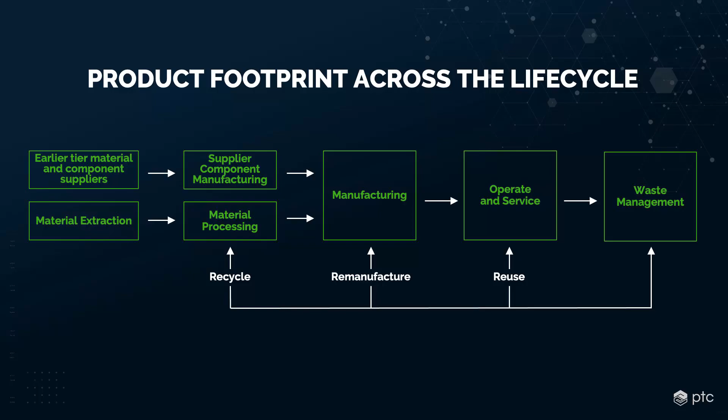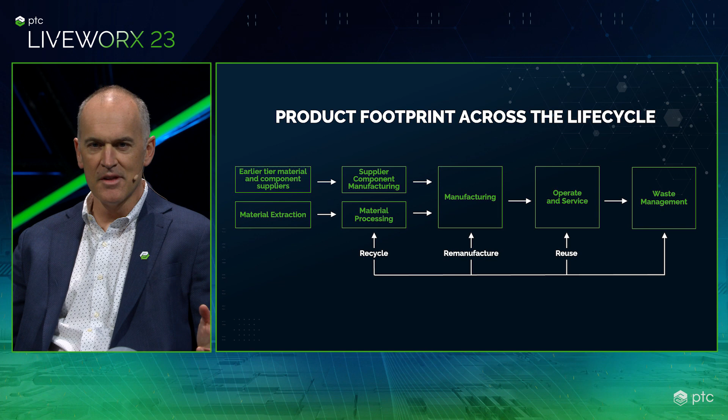One point there is that in the factory, you may think that's where all my emissions are as a manufacturer, but in reality, for most of our manufacturers, it's on the sides, the upstream and the downstream, where 90% to 99% of the total emissions exist. Yeah, it's the place where people see all the energy being used, but it's not actually where the true driver is.

So with that framing in mind, I think it would be really helpful to walk through the product life cycle, really from design all the way through to end of life. And we'll share some examples with you all of what's already been done, and maybe some promising areas for further focus as well.

And I think any of you that were at the keynote yesterday, Jim mentioned that 80% of a product's footprint is determined by decisions made back up in the design phase. So maybe explain that 80%, Dave, where does that come from between upstream and downstream? We hear about 65% to 85% are with design decisions, but overall it's pretty high.

Because products are made out of materials, and embodied carbon is such a big piece of that, and for some energy intensive products, you have to make design decisions around how they use fuel or energy downstream as well. Yeah, so it sounds like sustainability is going to make the life of a design engineer a lot more challenging.

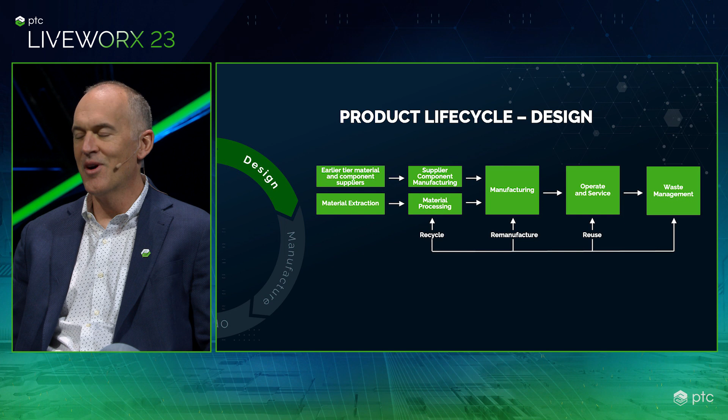You used to try to balance performance, cost, and maybe time to market, but now you're adding footprint to the equation. So it rapidly becomes a plate of marbles that you're looking to balance in a multi-criteria way. But the good news is, one, there's technology that can help, and secondly, it's motivating for engineers to do this. They all want to reduce footprint and cost in measurable ways in their jobs.

So definitely a challenge. Given the importance and impact of choosing material supplier, yesterday we announced that we were expanding our partnership with ANSYS.

Let's give folks a little more detail on what that integration looks like and why we're doing that. Materials have been front and center in design decisions for a while for performance, cost, and appearance, but what's really pushed it to the forefront, where designers need to get involved earlier in the design process, is embodied carbon and hazardous material regulations, and recycling possibilities, particularly as companies are making those commitments.

So Granta offers a curated material database that comes with thousands of reference materials. Customers can add their own supplier-specific material variants, as well as their custom materials. This helps engineers find better materials, and then ultimately better suppliers of that material, because suppliers also innovate in different ways to take footprint out of product.

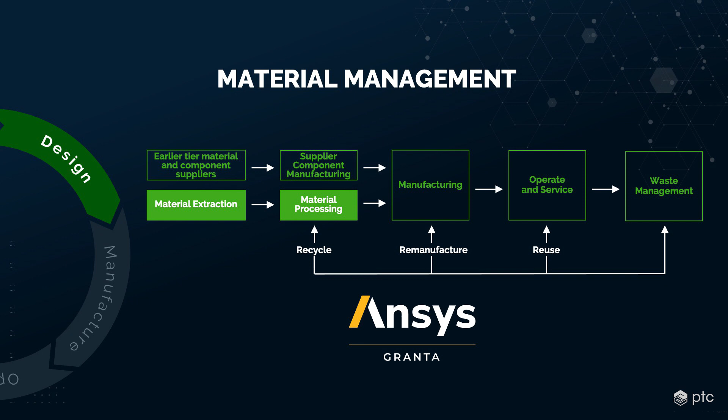So let's take a quick look at this video. As you see here, there's a user that starts in Creo, and then punches out to the ANSYS Material Gateway database, which is purpose-built for a design engineer to use. They select parts that the material engineers allow them to see based upon whatever criteria they want, like density or footprint, and you see here a list of candidate materials returned.

And they take a closer look at titanium, where they can see attributes across appearance, performance, footprint, and other things. They say, okay, great, that titanium is something I want to use in this turbine part. So they select it to go in their project, and then add that to the specific parts they want to include it in, including this turbine.

So next, they go back out to Creo. And within Creo, you can see that the Granta material ID is properly linked and part of the digital thread as a high quality reference on that Creo design. And this integration works similarly from Windchill as well.

So Granta definitely helps with sustainability for these, I'll say, make parts. But what about pre-built components or buy parts? Right, so there's been a strong market of supplier component databases for a while that both Arena and Windchill have integrated with. Some of these include Assent, Compliance Maps, Silicon Expert, Octopart, which is now part of Altium, and IHS Markit.

And the trigger for design engineers to get involved with this earlier were hazardous materials like REACH and RoHS compliance. But more and more, these electronic suppliers are including embodied carbon in their data as well, which helps with the footprint roll-ups and decisions designers can make. It's mostly electronics focused now with these catalogs, but now that embodied carbon is such a big deal, we expect this market to expand into other areas, and we'd be able to integrate in similar ways.

With environmental impacts of mining and material processing, it's great to see that this is now an integral part of the digital thread and digital transformation decisions. But it'll also drive other values like performance simulation and manufacturability planning.

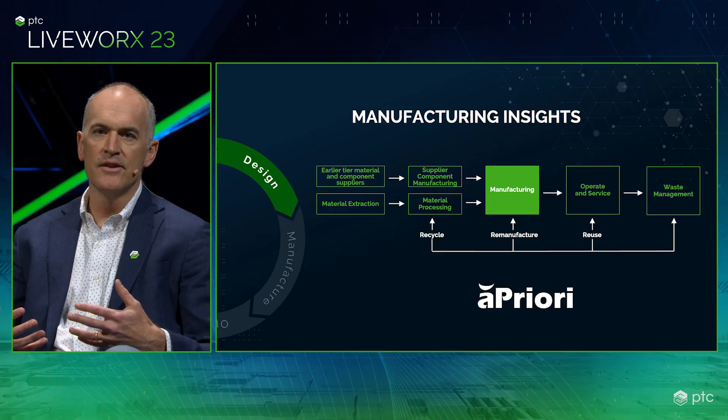And the way it does that is it takes material definitions and geometry from CAD and PLM, and runs a simulation with their digital factories, returning a scorecard that tells you how well you're doing, but more importantly, it prescribes ways to improve.

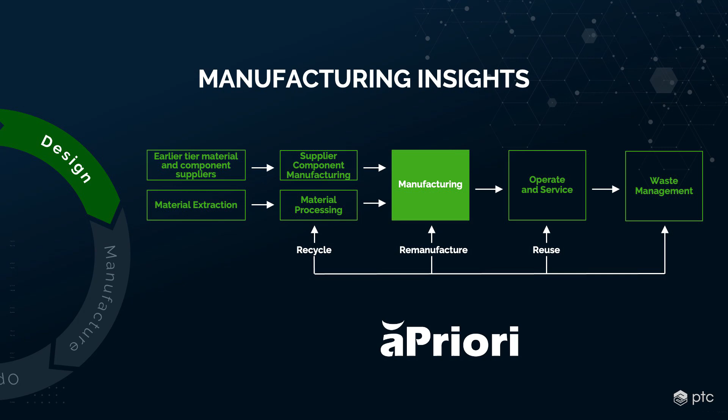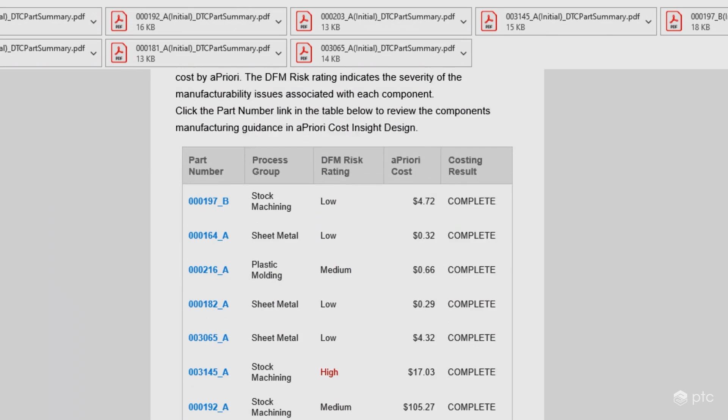So let's show you an example here. In this scenario, aPriori can run a batch job. It could be daily, it could be more frequent, based upon checked-in or state-changed parts within Windchill.

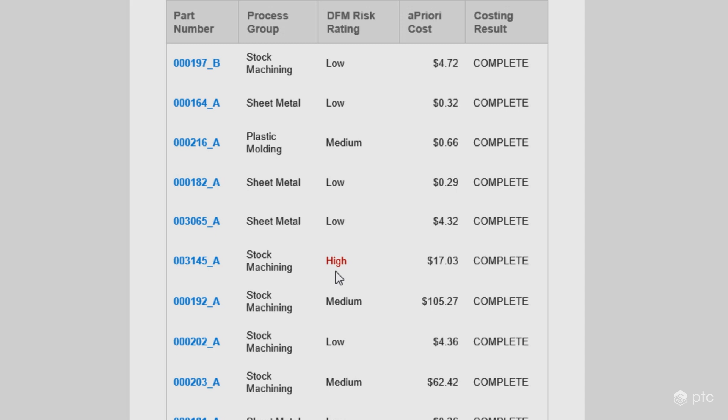And here you can see most of the parts come back okay, but there's one that has high risk. So here, the part owner in Windchill can look at this report and click on a hyperlink that takes them into the aPriori aP Design product, which is also purpose-built for a design engineer, and figure out why the score is high on this.

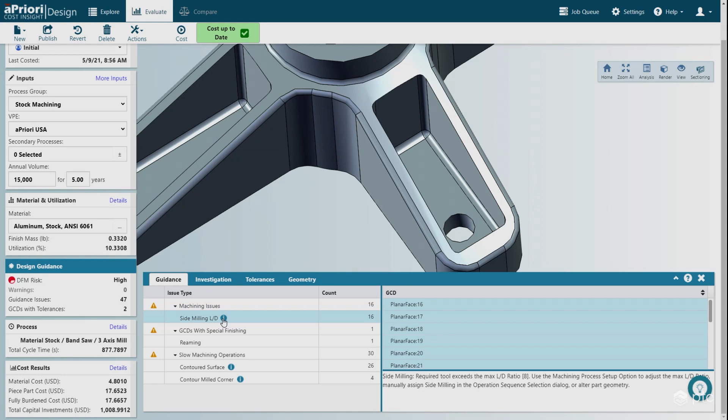It's because the inside diameter is too tight for quality milling, which can result in unwanted scrap rates. So it recommends that a rounder corner diameter be made. They go back into Creo, and reasonably quickly they can make a better inside angle that's a little more gradual.

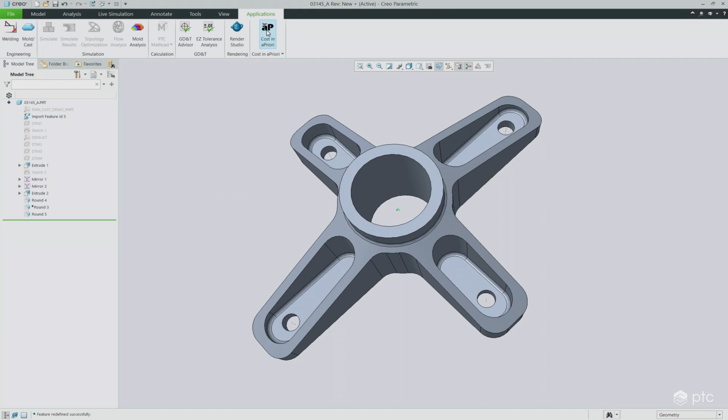On the inside there, so that their scrap rates will go down. And interactively, they can punch right back into AP design and rerun it, asking: okay, you asked me to fix this, I fixed it, how's it look? Great, the red's gone. So they fixed that problem.

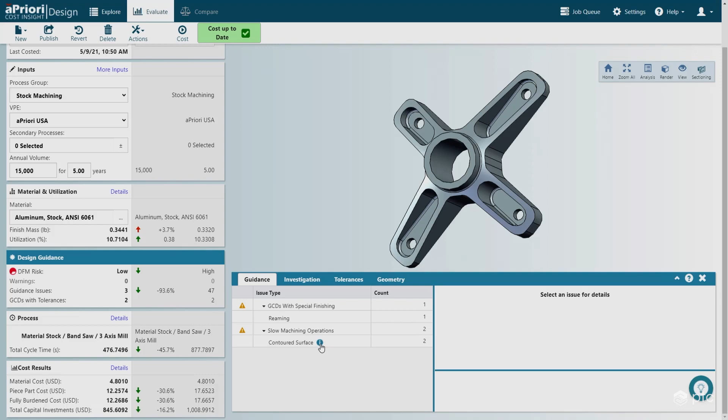And subsequently, they can look at all the other data they get back from that simulation to see if there's any other tweaks they want to make. They can look at manufacturability, cost, footprint, and here they find a less severe, but a tweak that might be worthwhile, potentially removing some material to get a smaller angle on the part, which makes it easier to manufacture and dematerializes it a little bit. So there's a lot of value here for running this subroutine. Definitely worth investing in.

All right, so Granta, or ANSYS Granta, and aPriori both help with material selection, but reducing the amount of material is also another significant driver of sustainability. Yeah, it sure is. Let's show an example.

Here's a 44-pound motor mount of a Volvo truck. It supports an 11-liter engine that weighs about 2,000 pounds. It's made out of iron. It functions really well, but I can barely lift this thing. It's a beast. I don't actually know what's wrong with you, Dave, because I can lift with one hand, no problem, the exact same part that takes even more peak stress than that old-fashioned mount that you have.

It uses the same material, same casting process, and it's using our generative design technology. Want to explain a little more, other than the fact that you need to go to the gym? Yeah, I could probably skip the gym and just hit that generate button a little bit more, because here, what you did removed between 50 and 60% of the embodied carbon of that part. But more importantly, you took 26 pounds out of the truck. Okay, that's going to drive down the road hundreds of thousands of miles, so that's going to reduce either fuel needs if it's diesel, or electric needs, or hydrogen needs if it's an alternative powertrain.

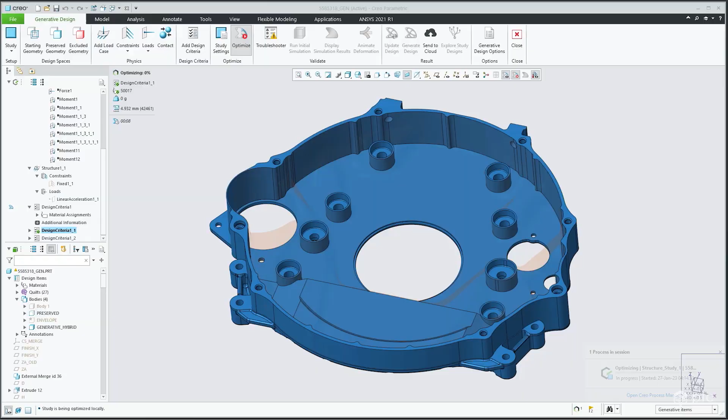Designing for sustainability has many flavors to it. The place where I'm placing a lot of my emphasis is to make sure that when we design a product, we don't design it with any more material than is required to attain its strength or stiffness goals. So it's really looking at the full life cycle of the product and making sure you're not using any more material from cradle to grave.

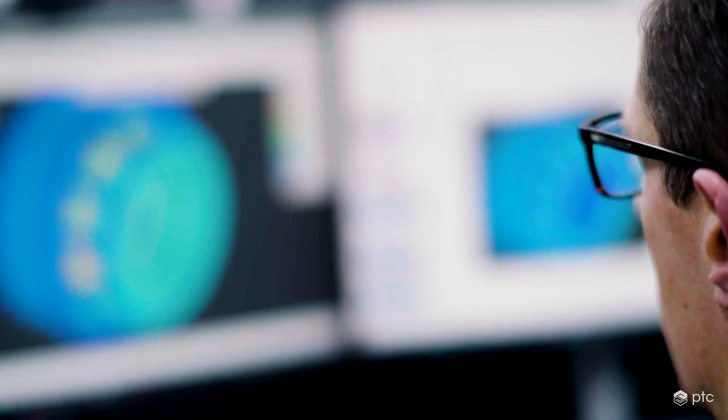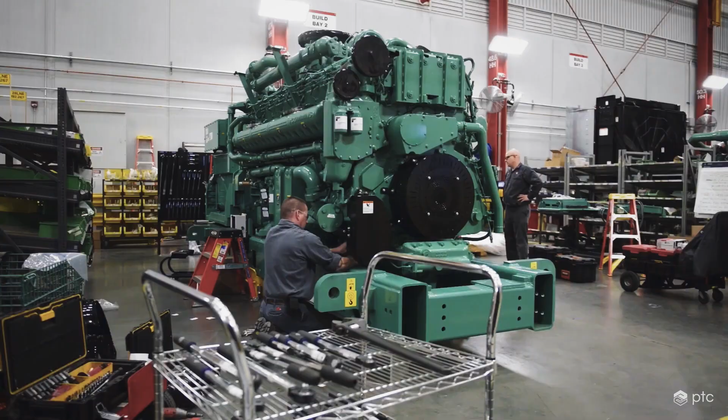And to do that, you need special tools like Creo Generative, or tools that help you understand where you are potentially putting wasteful material into the product. Some of the analysis tools within Creo enable us to do the iterative work up front within design, where it's the most efficient place to do that type of work.

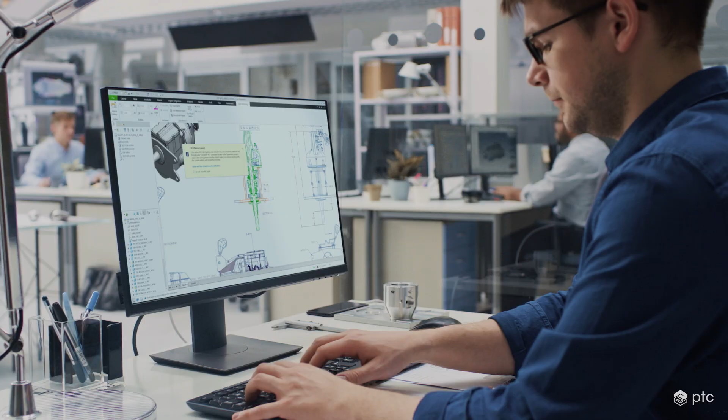Design engineering really does have a very important role to play when we're trying to meet our sustainability goals. We now know that when you apply these techniques, you can expect to save between 10 and 15% material use, and you can pretty easily calculate what those benefits will be from a total CO2 perspective. But one thing nobody knew until we did that work is how much that would translate to in terms of overall cost savings over the course of the year.

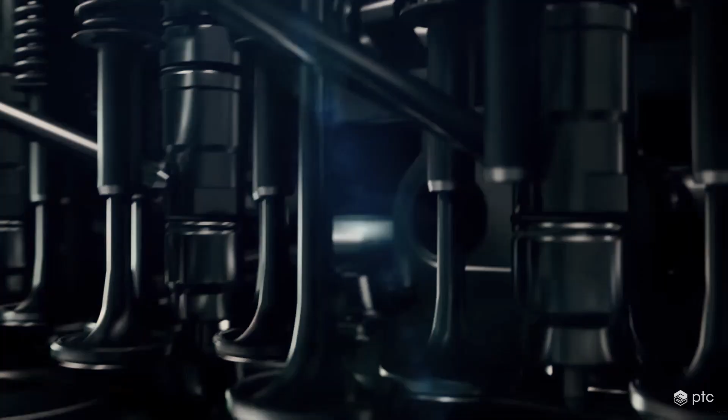There was not only a big impact on the environment when you take that 10 to 15% savings and multiply that by the number of components you make annually, but there's also a cost savings that comes with that, and a weight savings. The weight savings has compounding effects when that engine goes to work in a truck. The less an engine weighs, the better fuel economy it gets. It really has a compounding effect.

From a design engineering perspective, it really allowed our designers to go home at the end of the day saying, I saved $500,000 today, or I saved $200,000 today. It really provided some value to their role that they had difficulty making tangible before we started this work.

Fantastic, that's a superb story. Not only is Cummins achieving their sustainability goals, they're also driving costs down and actually energizing and motivating engineers in the process. So a triple win.

Let's move on to the manufacturing side. We discussed several ways that engineers can set up the factory for success through materials and material supplier selection, lightweighting, and manufacturing simulation, but there's a lot more that can be done.

One of the areas that there's a lot of folks out here talking about is energy management or energy efficiency. Talk about some of the products that we're seeing and the partners that we're working with.

Energy management—we mentioned earlier that the factory is the minority of emissions for manufacturers, but it's your scope 1 and scope 2. It's the direct energy that you can affect. So the Science Based Targets initiative and others prioritize bringing that down. This is absolutely a priority for companies to do, and they're doing it.

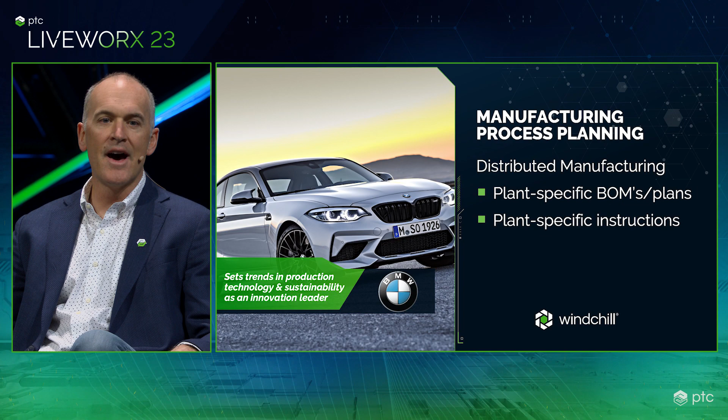Maybe we should move on to the next phase of the product life cycle, the operate and service phase. During this phase, there are two big footprint items. The first is shipping or sending service workers or technicians to a location to service the product, or shipping the product back to a central location. The second large footprint activity is all the embodied carbon tied up in spare parts networks for just-in-case stocking. Here we have lots of examples of companies using our service products and solutions to both get great business results and do good for the environment. Maybe we should talk about a couple.

Metso is a mining equipment provider. Before you all say something about a mining equipment provider at a sustainability talk, the truth is there's going to be a spike in mining for renewable energy infrastructure over the next decade. Working with our Servigistics team, Metso has been able to permanently drive out over 40 million dollars of spare parts, so a lot of embodied carbon completely eliminated. Business-wise, they've been able to improve their fill rates by over 3%.

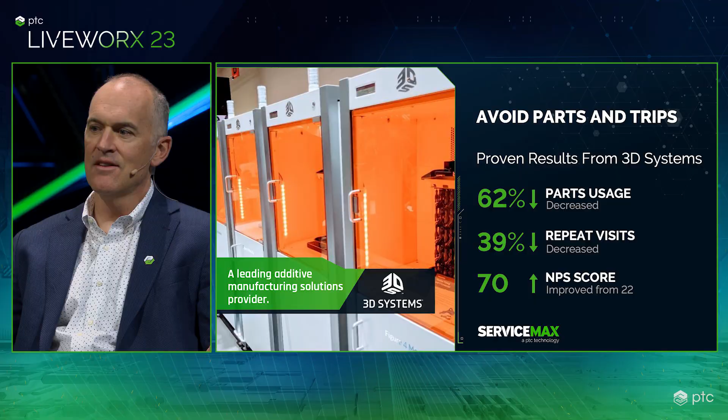Similarly, 3D Systems from a field service perspective has great results as well. Like our other customers helping with the transition, 3D Systems is a leading additive manufacturing solutions provider. They help move the needle in a couple ways. One is 3D printers by nature dematerialize, because you don't have the same subtractive manufacturing constraints you would otherwise have. Secondly, which many people don't know, is they also deploy 3D printers to remote sites, like a mining pad in a remote area or a large ship out at sea, so they can print critical parts on the spot rather than have that asset down for a long time and spend all the fuel to helicopter parts in as an emergency.

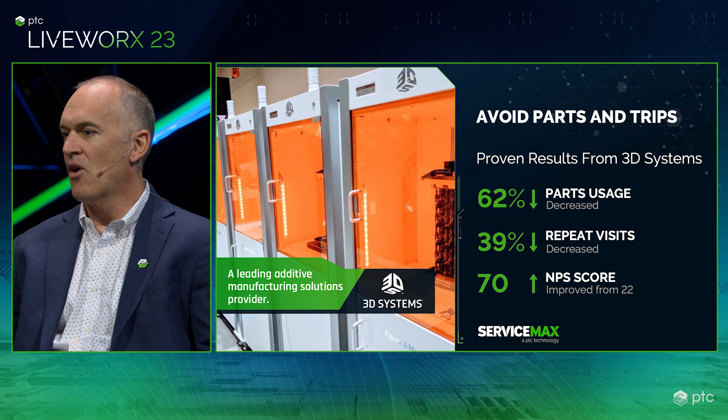But 3D Systems has deployed through ServiceMax an asset-centric field service. If you think of field service classically, it was more appointment-based. Like cleaning services or your cable company, it's a foregone conclusion that you're going to roll a truck to the equipment or customer site, and it was more a problem of how do you efficiently move people. But with asset-centric field service, kind of like with Servigistics, you order or manufacture a new part as a last resort, and you send a dispatch as a last resort. There's so much you can do remotely to resolve issues, either through software updates or helping the customer out remotely. And if you do have to roll a truck, you can prepare much better remotely, so you fix it on the first trip.

So what 3D Systems has been able to do, and the results they've seen, have been astounding. 62% fewer parts used because they have precision diagnostics, and when their tech shows up, there's a 39% lower chance that they'll have to come back because they couldn't fix the issue the first time. That second one has resulted in an NPS leap from 22 to 70. And if you're not familiar with Net Promoter Scores, anything over 50 is considered superb.

So I think this can tie to end-of-life recovery as well. They can drive parts and assets returns. And as we come to the end-of-life phase, product circularity becomes a critical need. Now, the reality is only 6% of the world is circular today, so we have a long ways to go.

Maybe challenge and an opportunity? Yeah, so the opportunity is huge, because the idea is either when a part's end of life or an assembly or their entire asset, if you can reuse pieces of it and not have to send it back to the factory, or remanufacture it and not have to reprocess the material. Or if you do have to reprocess the material, go ahead, but at least you're not digging it out of the ground again. That's good for sustainability reasons, but more and more, that also makes commercial sense to do.